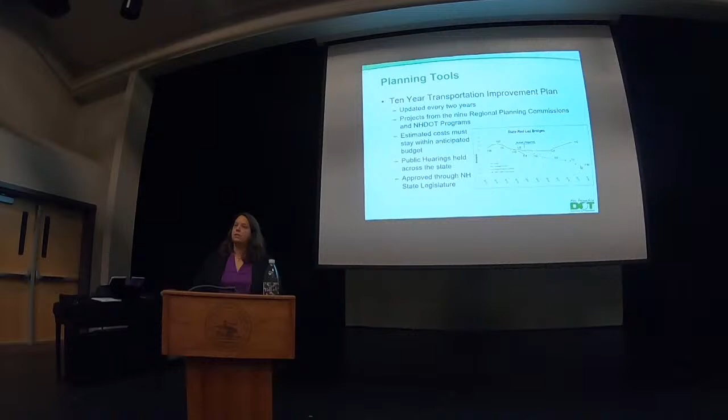One of the other things that gets very complicated in the development of this plan is that the funding comes from multiple sources. The bulk of our capital improvement projects are funded through federal funds. We have a few state sources for specific needs, and each type of funding comes with its own set of restrictions and requirements for use. Even within the federal funding, there are breakdowns based on population and project type that we have to carefully fit the projects to the funding.

So getting back to this project, where did it come from? When did it start? So this was first introduced into the 2003-2012 10-year Transportation Improvement Plan. It was scoped at that time as a bridge rehabilitation project, with design funds first allocated in 2011. That's actually when we did obligate the design funds and start that work. Initially, it was added into this bridge priority ranking as number 124. This was back in 2006. It is currently ranked 2 on that list. It was added to the state red list in 2013 when one of the elements became condition rating 4. So again, condition, not safety. And that, again, has a ranking of 2.

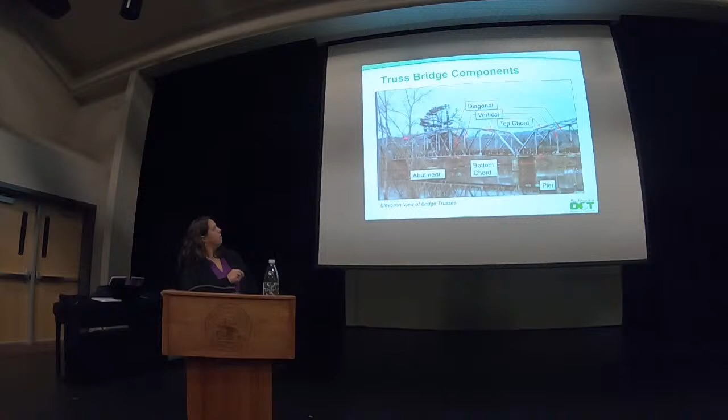So talking about what are we doing to the bridge? So here's the bridge. These are some of the various components of the truss bridge. Okay, this does show up. So what you're looking at here, sort of one side of the truss, the verticals, diagonals, the bottom chord. Underneath, there are a series of floor beams that connect the two sides of the trusses together. Those are right here. Every so often. There are 10 of them in each span. And spanning between those floor beams are a series of stringers.

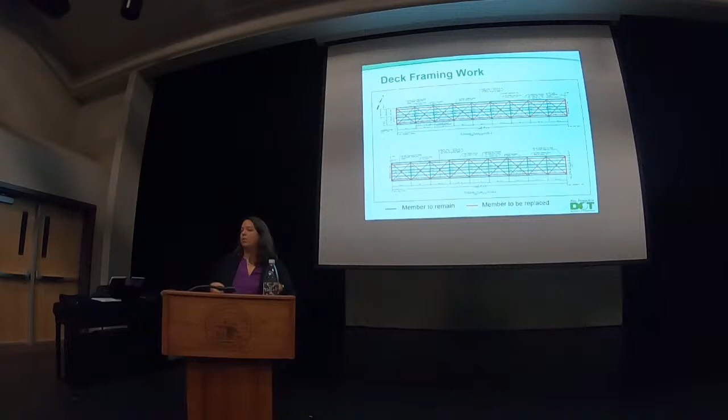The lateral bracing ties into some of the same connection plates. So even though it doesn't all necessarily need to be replaced, because of the way this is constructed, we're removing it anyway, might as well put new bracing in. So that's why you're seeing those red X's are these pieces here. So they all frame into some of these areas that we're working.

So just to summarize, we will be doing some abutment work. We will be doing some repairs to the concrete at the pier. We'll be placing a jacket around the pier at and around the water line. So that's where the worst deterioration is. We'll be cleaning that, adding new rebar, and then forming concrete around that to jacket it or hug it. We'll replace those portions of the framing system that I had shown in red. We'll be replacing the bridge deck by virtue of the fact we have to get to the floor framing.

The bridge rail and curb will be replaced with concrete curb and modern crash-tested guardrail. The whole truss will be cleaned and painted. And then there will be some minor approach work, 50 to 100 feet or so, just to make sure everything ties in nicely.

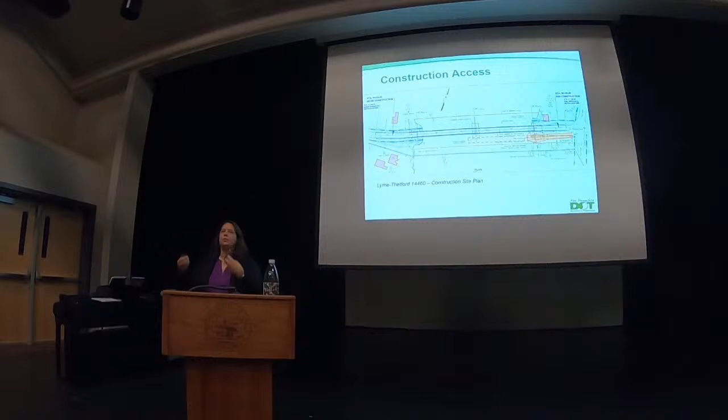And so that's what led to the decision here. It wasn't necessarily the homes, that factors into it, but when you start to have to put something at least this wide, if not wider, in a space that's not that big, that's a challenge. From the bike and ped side, this one has come up several times in the project history. We did review whether or not it was possible to cantilever something off the outside. So this is similar to what was part of the original design on Orford Fairlee.

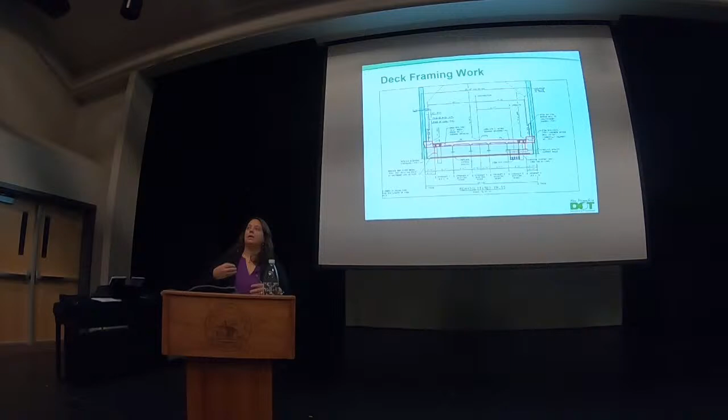Some of them we've been able to add them. I know Orford Fairlee came up as an example. That was original to the 1930s structure. So when we looked at adding that sidewalk, what we found was that the bridge members at that point can't take that additional load on top of legal traffic loads. This goes back to that cost. What was that purpose?

The purpose where we started this project was to address the condition of the bridge. It wasn't to expand and make a bicycle and pedestrian connection between the two towns. The roads don't have shoulders or sidewalks right now. So if we were to build that on the bridge, where do they go once they get off the bridge? So it does factor in, but we also have to make the best use of the funding that's available to us and the best use of the resources we have.

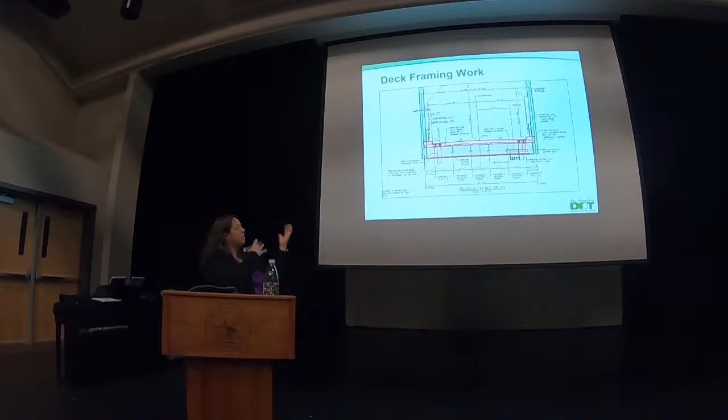So ultimately, this is all taxpayer money. And we're trying to do things as efficiently as possible, as fiscally responsible as possible. Our estimate on a temporary bridge is somewhere in the neighborhood of approximately $5 million. That's a huge cost for 2,200 cars a day. On top of the physical limitations of where do we put the bridge.

So that is a piece, and then there is the environmental piece with the historic aspect, that this bridge has life in it, it's valuable from a historic sense, and that's what we're trying to preserve. I think there was a gentleman in the middle here with a plaid shirt.

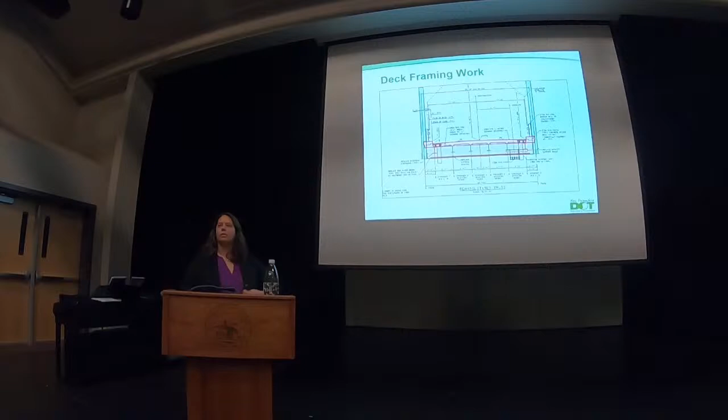You laid out a schedule ending in October 2024. How often, if ever, do these projects stay on time? And what's the track record of this low bidder for staying on schedule? Are we going to be looking at 2025, 2026? I mean, are we going to all of a sudden say, oh, we couldn't get it done? Because that seems like we're right up against the following winter there.

I don't have statistics necessarily on how often any particular contractor goes beyond schedule. It does happen on occasion, but I do not foresee that this would extend into the next winter. Jeff, do you have anything to add there? I don't have anything to add to that, in the sense that a lot of the projects do come in on time, and in this particular case, the completion deadline is cast in gold in the sense that they start incurring liquidated damages.

Typically, one of our goals is to carry legal loads, but that is something we could go back and see, would it be possible? My guess is if you talk to the people here and asked whether they wanted a cement truck to safely pass over it, or, when it's completed, would they be willing to pay a little extra for a concrete delivery and have pedestrian access? I don't think there'd be much doubt as to what the outcome of that vote might be.

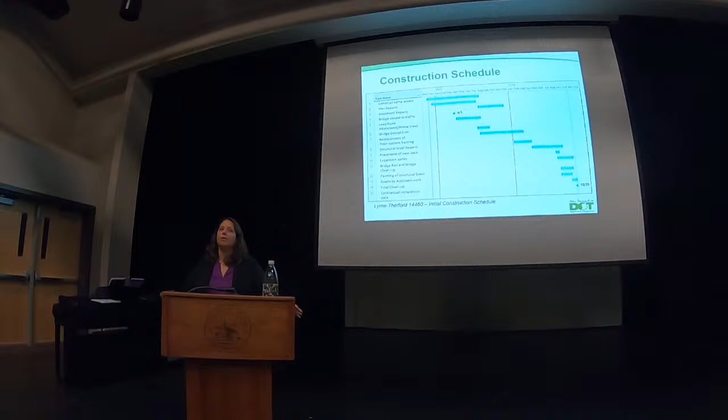So for an engineer to look at those abutments and feel comfortable putting the traveling public on stone abutments, unknown foundations, unknown stability, we would be looking at whole new temporary structures in the river. A temporary bridge of this magnitude, we're looking at somewhere between 550 to 600 feet, depending on where the location is. For a temporary bridge, that's looking at 4 to 5 spans, most likely, to span that. So we would be looking at approximately 3 or more locations where we need to put temporary supports in the river.

This section of the river is quite deep. After they built the dam downstream, some of the initial pictures, it's amazing. The whole pier is exposed, they built the dam, and the water level came up. So there are quite a few challenges associated with that temporary bridge and that North Thetford crossing between the right-of-way, the railroad lines, and the ability of those abutments to carry load. It isn't really a feasible location to do that.

We'll go with the woman in the green jacket.

Yes, I wanted to comment on the bicycle and pedestrian crossing, and while this may not be an ideal solution, I've wondered about having a traffic light or something at the access points that could be somehow controlled, perhaps by a pedestrian or some other means, so that pedestrians and bicyclists would cross, and that would avoid any additional cost of a pedestrian bridge. I know that in covered bridges, we can typically stop and allow traffic one at a time to go through, and that doesn't seem to be a problem. There's more traffic going over this bridge, but still, maybe that's a solution that would allow pedestrians and bicyclists to safely cross. Thank you for that comment.

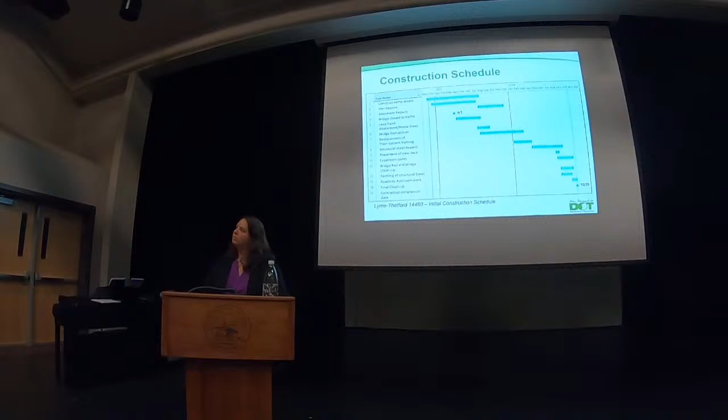I'm really disappointed that in the vast bureaucratic approach to what bridge we would get, it was all environmental and historical and wetlands, and the needs of the communities were never addressed. The needs of a modern bridge were never addressed. It was this old relic that was fine when vehicles were not as big as they are now. And we need to look at the future, and we need bicycle and pedestrian access as we try and stop climate change and change our transportation away from vehicles. We need pedestrian, we need bicycles.

And please, you seem to be telling us the door is shut. It's all decided. You can't go back on this. But is there any way that we can put a halt on this and reevaluate this? Because really, you're giving us a bridge that's an antique from the past. We need a bridge for the present and the future. So please try and do that.

So before we go on, when I opened the presentation, one of the things that I explained, we are in construction. We have a contract with the contractor. Yes. I just think that's a wrong attitude. Well, sorry. So it would be unprecedented to cancel that contract. We have spent millions of dollars that would need to be paid back to Federal Highway.

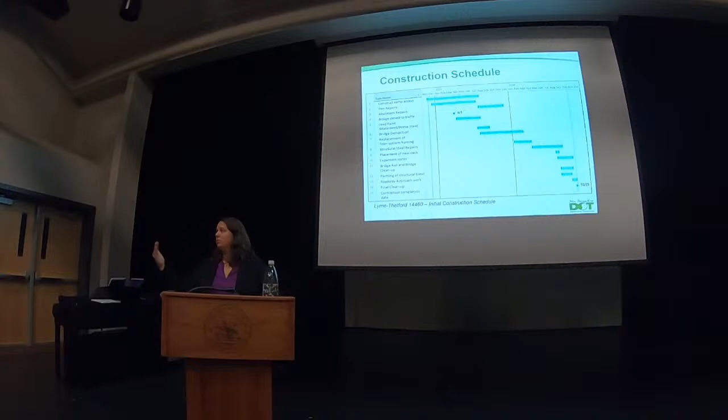cost of this rehabilitation. So I know, like I said at the beginning, this isn't necessarily the answer some people are going to want to hear, but we have to make difficult decisions with the transportation funding we have to maintain the infrastructure we have the best that we can. And for this crossing, that resulted in the rehabilitation. So, woman in the back, yep.

I just have a question. Is there any economic compensation for businesses that will be adversely affected? Because most are small businesses, individually owned by local people, and I just think it can really impact their economic viability. And we depend on these small businesses for groceries, for, you know, our dentists, our physicians, our haircutters, everything.

So there is not an ability to compensate businesses directly. One of the things that I've been speaking with a few of the town officials about is the possibility of adding some business signage to help get the word out. Now, that's not something that Federal Highway can fund, but if there were other sources to fund that, we could work with the towns to get them up and make sure it's known that they're open, help provide some wayfinding signs.

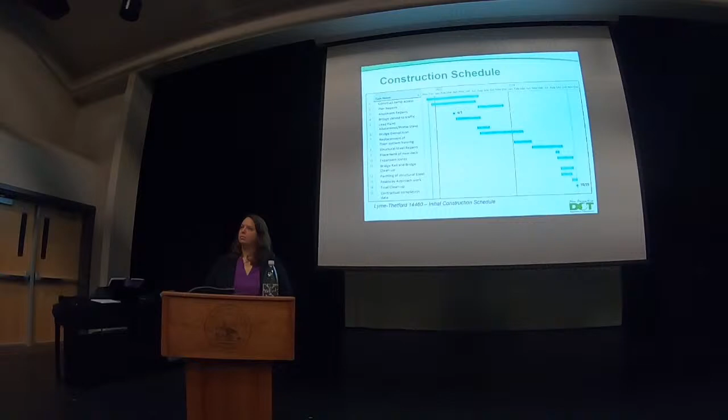But with regard to the historic aspect, which this lady thinks makes it absolutely no way, I don't believe that's the case. If you have something which causes an adverse impact, which of course taking the bridge down would be an adverse impact, it doesn't mean that you can't do it. It kicks in a different process, and that process requires consultation, as in meetings like this and others. So I don't think people should think that it's a no way Jose if it's a historic resource. It's still possible to have an adverse impact.

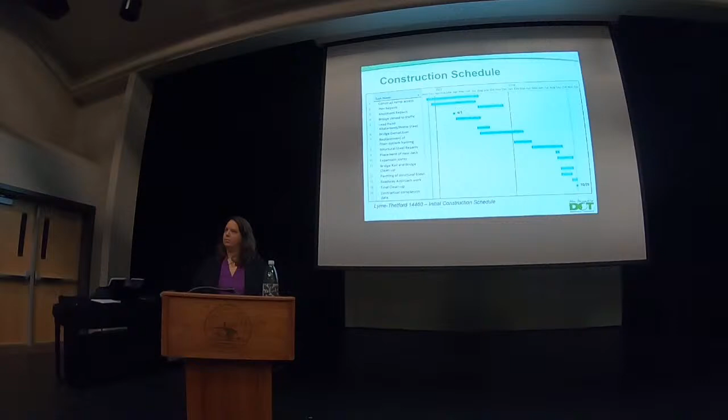And I heard you mention the 10-year state plan, but that is a plan with state policies. The plan can be changed if the design for a new bridge was available in 2 years, let's say. One could adjust the plan. It is a fact of the legislature making decisions. I would hope that our representatives working with you guys can come up with an innovative financial way to make this happen, to meet everybody's needs.

Thank you. I'm going to have John respond to the historic piece. John is our Chief Environmental Manager. So if I'm understanding your question or comment correctly, as Jennifer mentioned previously, Section 4(f) requires us to first avoid the use of a Section 4(f) resource, in this case a historic resource. And then if we can't avoid it, we have to choose the alternative that results in the least overall harm. That takes into account a lot of different things, like fiscal constraints as well as safety concerns. And all of those go into that assessment.

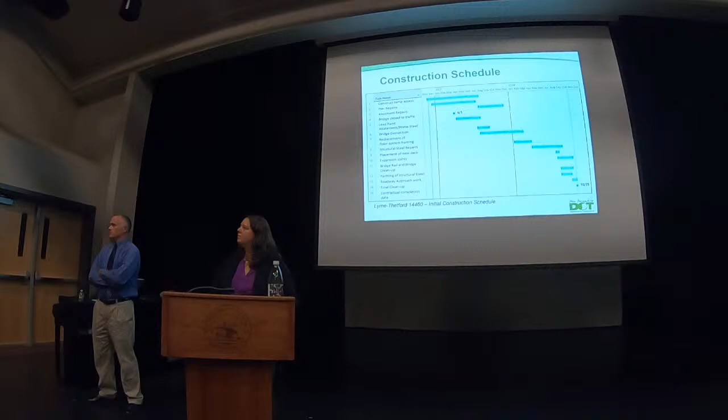And while you're here, if you could briefly comment: it occurs to me that there would be a lot of environmental disruption involved with constructing a new bridge. Could you make some comments on that? Compare the two alternatives in terms of environmental impacts on the river?

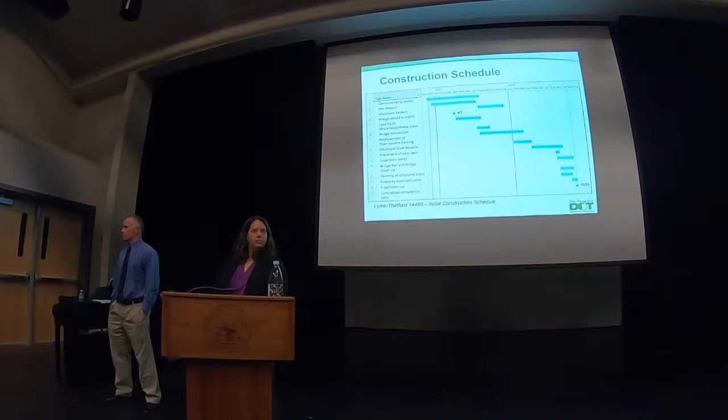Sure. A lot of the environmental assessment came down to the original assessment that a rehabilitation option was a viable solution. So then it's a matter of looking at that and the environmental impacts associated with it. So we don't go into depth with the environmental impacts associated with, say, a replacement option, because we had already determined that a rehabilitation option was very much on the table, and was essentially the preferred or anticipated alternative.

That having been said, if you're replacing the bridge with a larger structure, it does result in increased environmental impacts. If we were to replace, we likely would have to replace with a larger structure to meet some of the DES requirements for the length, and this is a long bridge. Jennifer's the bridge engineer. I'm not an engineer, but one thing I can tell you with moderate certainty is that, how many piers do we have? Just one. It's unlikely you'd be able to construct that longer structure with a single pier in the middle.

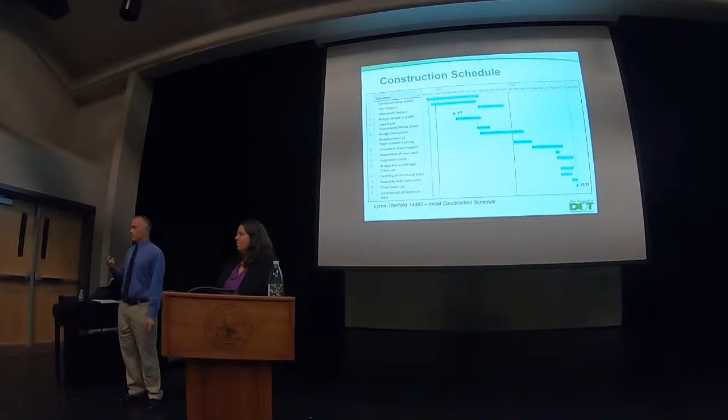You likely would be into several piers, increased impacts to the banks and those kinds of things. From a natural resource standpoint, a rehabilitation option is always going to be the least environmentally impactful alternative, simply because it doesn't touch the surrounding area as much as a project replacing the bridge itself. The footprint would get larger, the abutments would need to be larger, and in order to maintain traffic, you'd be talking about off-alignment, which means disrupting more of those banks, more of the stream channel itself, and the list goes on.

One of the other things on the replacement that I may have written to one or many of you: a truss bridge like this carries most of its load in the truss above the roadway surface. So when we go to a more conventional girder bridge carried by beams below the roadway surface, with spans like this, we're looking at a roadway increase in the neighborhood of 6 feet or more. That's 6 feet adjacent to these homes, 6 feet that needs to tie into these intersections. And then we want a wider structure, so that footprint expands significantly.

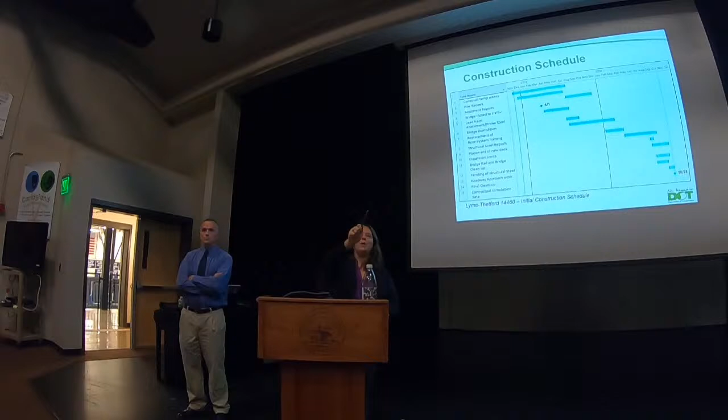I know we, I see you, but I want to make sure we get to anybody new. I think, have you spoken?

It is unprecedented at this point to go back. It doesn't mean I can't ask the question. I know that my business is only open 6 months out of the year. If we're going to lose $1 million, and we're just a small little farm stand, the businesses on both sides stand to lose probably tens of millions of dollars.

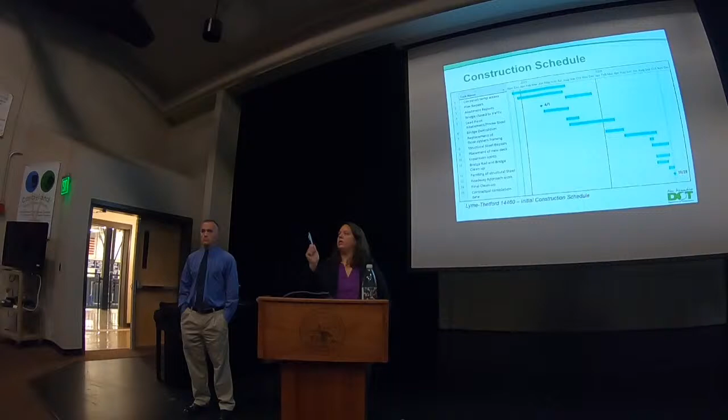Okay, anybody else? You've got online questions here. Oh, that's right. Sorry. Okay. So, Mary Helen Bentley asks, I'm wondering if there can be a boat launch area created so that we can ferry back and forth between Vermont and New Hampshire. Yeah, $50 a head. I know.

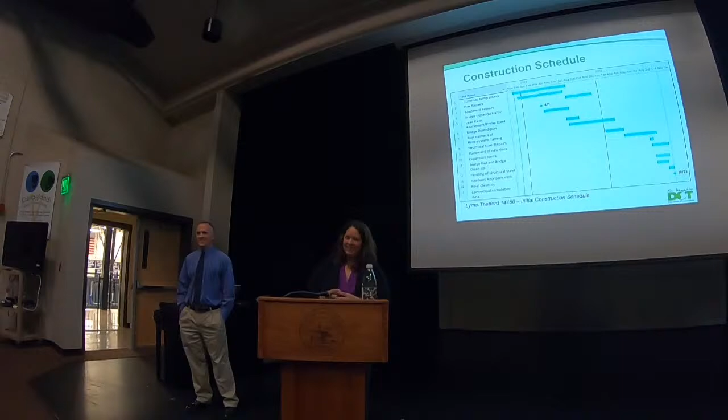Sarah Crockett asks, if we can't change the current plan for the bridge, what would it take to consider adding a smaller bridge that could support a single vehicle or like a stoplight at either end? Going through, Keith Borgstrom asks, why was the contract awarded without first seeking out input from the residents? Can you repeat the question? I didn't hear it. Why was the contract awarded without first seeking out input from the residents?

Liz Cole asks, did you say the design began in 2011? Yes, the funding was first obligated for the design in 2011. I believe the contract, or the consultant, was issued notice to proceed either late 2012 or early 2013. So we'll often do survey and some of that initial work right off the bat, and then once we have that information, our design consultant will start work.

Leslie Gannon asks, will there be a link to these slides in a future time? Yes, we can put them up on the department's website. There's a project website on the department page, and we can post this. Trying to go through any that are redundant.

Matt Hayden asks, why move to achieve a goal without thoughtful alignment of that goal setting with stakeholders? Probably also answered. Part of that 10-year plan, again, that's an opportunity for everyone to come and have a say in what projects move forward, how do we program those projects. So again, if you're interested in transportation, interested in bike ped, look out for those meetings, keep that on your radar as a time to provide that input directly to the Governor's Advisory Commission on Intermodal Transportation.

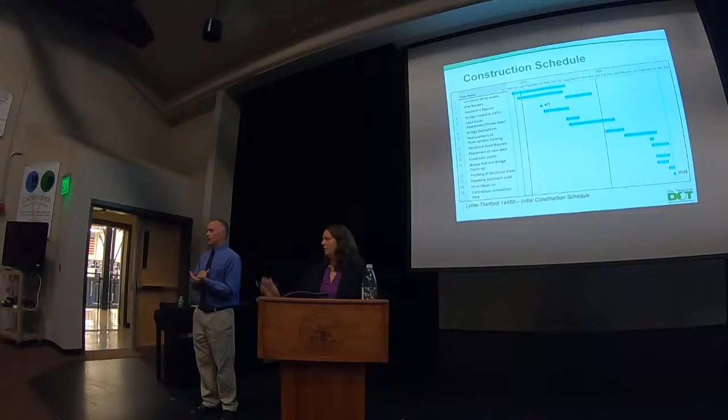And as a result of that, you're going to live with this forever. Well, but that's just a confirmation that the prior decisions were correct. So that's really good. So I should keep my mouth shut. Pat Parenteau, ex-law professor.

4F is the issue. Okay, so the point of clarification here is you don't have the authority not to do a rehabilitation. Okay, so that's an act of Congress. Yes. If you want to change that, that's an act of Congress. They don't have the authority to do that. Okay, they never did.

Back here in the vest. Your vehicles per day census, when was that done again, in 2021? That's 2021. So our most recent data is 2021. I know there was some question about how much was that affected by COVID? How accurate? Yeah. So the 2016 data that we had was about 2,200 cars a day. So it's not a huge difference that we saw going back pre-COVID. The 2020 numbers are where we saw the most significant decline.

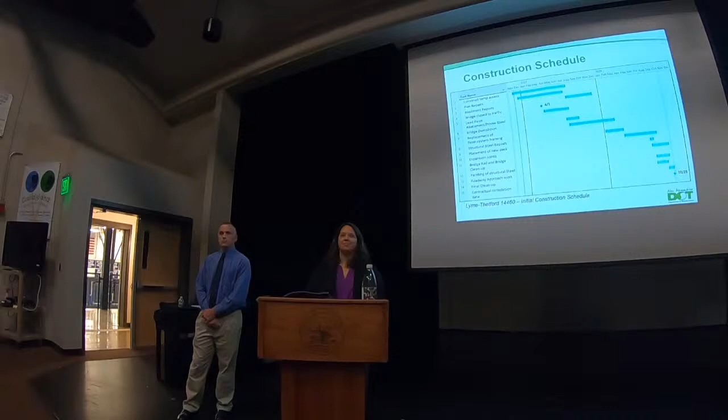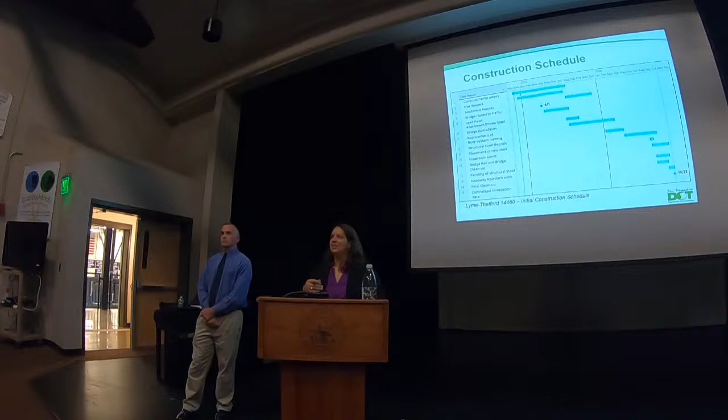Okay. Repeats. I'll try to keep it shorter than last time. Yeah, hi, Donna. Oh, I'm sorry, go ahead. I'm Bill Keegan, Thetford. I'm sorry, I didn't see any other hands. Thank you for your depth of knowledge in presenting.

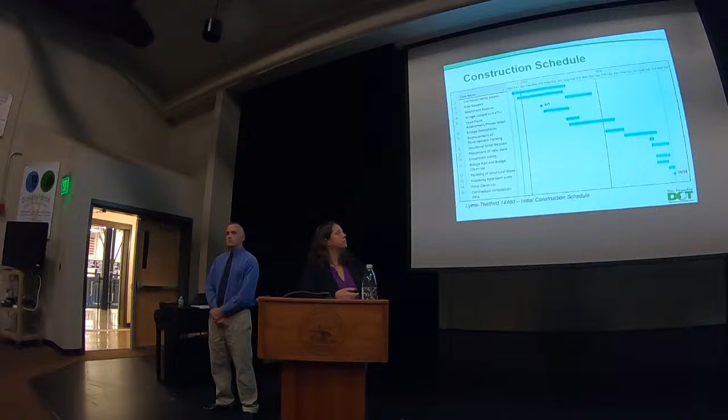So these that we're replacing, the deteriorated members, are not what controls the load carrying capacity. That is carried in the truss itself. So right now, today, it's being controlled by the deteriorated members. Once those are replaced, the controlling member becomes part of the truss itself. So it can carry legal traffic loads, but it can't carry pedestrians and legal traffic loads.

Could you work from the truss then to come down to the pedestrian bridge? I'm not sure I'm following. Well, if the structural members are trusses, is there a way to work off of those to come down and support the pedestrian walkway instead of coming off of the deck? Again, I don't want to get too complex, but all of the load of the deck, of the cars, ultimately is carried by all of the members that you're seeing here.